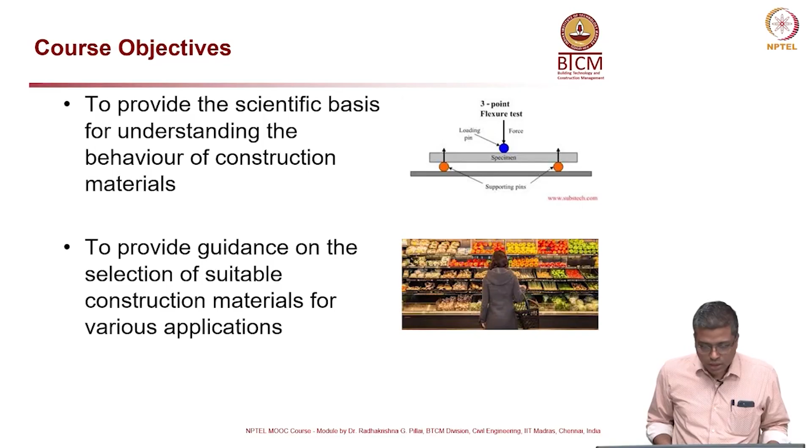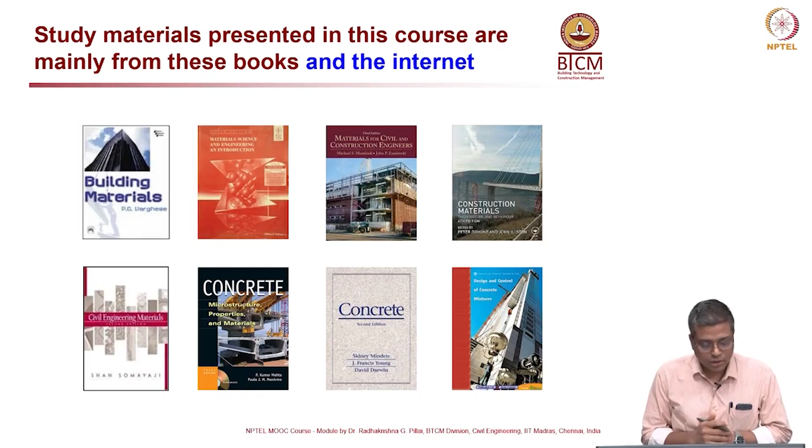Now, different study materials have been used for developing this course, including various books, and also a lot of information from various sources on the internet. So it is not just following one book; a lot of information has been put together for this course material.

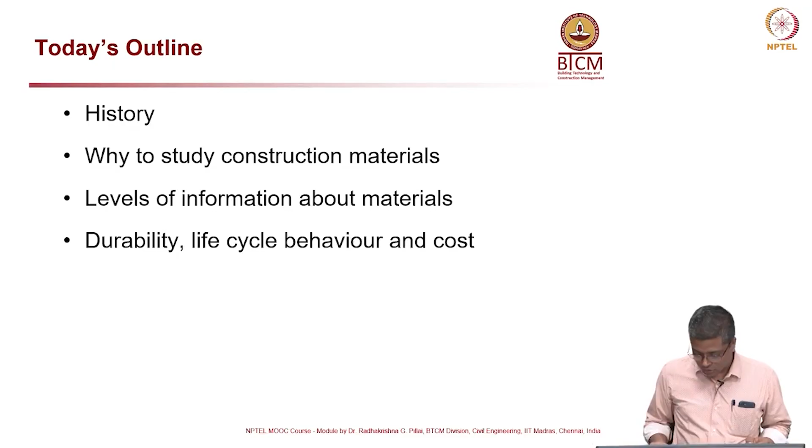For today's outline, we will first look at the history of construction materials and why we study construction materials and their behavior, and what are the 3 different levels of information about various materials. Then we will also talk about durability, life cycle behavior, and life cycle cost of construction materials.

Now, construction material science and engineering involves the use of basic science in understanding how a material will behave. That means we will even go into the chemical bond, molecular structure, microstructure, etc. of the material, and also how a material behaves in terms of its stress and strain behavior. That is also very important to understand.

Once we know the stress-strain behavior, or thermal expansion, or thermal conductivity, we understand how the material behaves when it is applied either a mechanical load or an environmental load. This is very important, and a material's behavior could be very different depending on the type of application or the place where it is used. Now, how do we engineer a material so that it is able to withstand both the mechanical and environmental loading coming onto it?

How can we control its properties so that the material is able to withstand such loads while in service? We should also think about the cradle to the grave concept: when a material is unearthed, manufactured, or processed from the soil or ground through various manufacturing procedures, and we put that into the structure, until that structure degrades or its life is over, and we eventually dispose of the materials back into the earth. All of this has to be considered while we choose a construction material.

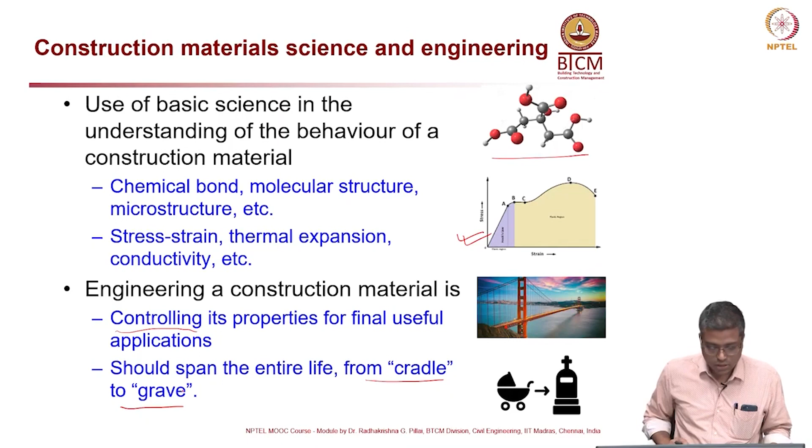Now let us go into the history of construction materials. First, we used to make houses or buildings using timber. Even today, in some places of the world, that is being practiced, depending on the climatic conditions and availability of timber.

We also used a lot of stone, and used to do that even today. Now, from the 20th century onwards, we've started using cement concrete, asphalt concrete, steel, polymers, composites, glass, and various other types of materials in today's construction.

Now, one question that comes up is whether all these materials are better than the ones in the past. Maybe not always. Some properties might be enhanced, but other properties might not be, or might even be less. So we have to really see what property we want from a particular material system, and whether the material in use is actually able to provide that or not. For example, in some cases strength may be very important.

In other cases, maybe some other property like thermal conductivity may be more important. So you have to see, but without compromising the strength. When you talk about material selection, all the properties have to be considered before we choose. Now, material research can solve some of these problems, or if you have an issue, it can

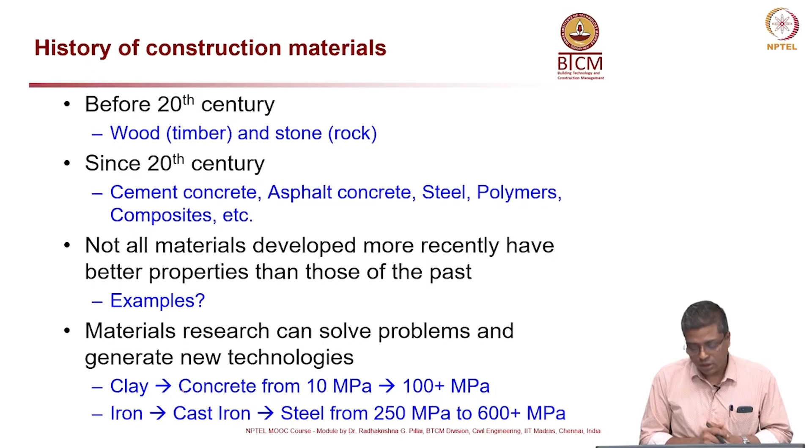Now, why do we need to know about the science and technology of materials? Because the behavior of material systems depends on properties at both the macro and micro level. So microstructure is very important, and also the macro behavior, how the material systems are put together, that is also very important when we talk about the behavior of a building or a bridge, for example.

Now, various information at different levels have to be brought together to give the foundation for materials technology which is needed for practice. Practice, when I say a material which is used, let's say a bridge, you use steel and concrete to make the bridge.

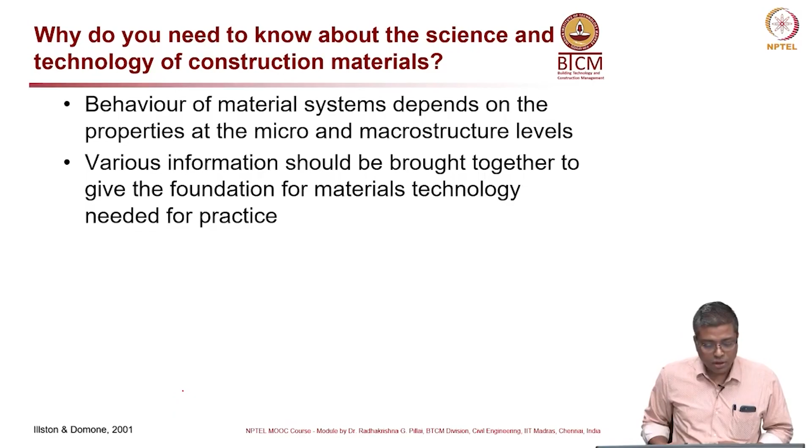If the bridge has to perform well for a long period of time, the properties of the steel have to be good, the properties of the concrete have to be good, and also when you put together steel and concrete as a composite system, that system also has to perform very well and meet all the requirements. Now, to achieve this, the material testing, how the material is processed, how it is handled and placed in the structure, and also the basic science behind all this have to be very thoroughly understood.

Hence, because of all this, training in the science and fundamentals must precede the development of new and better materials. You cannot really make a new material without really understanding the science and fundamentals behind it. So science is very important for application, which is essentially engineering.

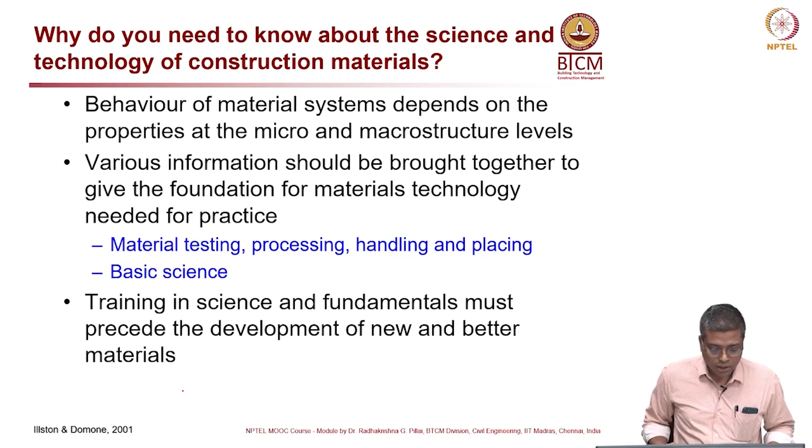Now, what are the three levels of information we talk about when discussing materials, especially in construction? I'll talk about three levels. One is the information available at the molecular level, which we can call the nano or micro level information. The next is materials structure level information, not the engineering structure but the material structure level information, which we can call mesoscale, and then engineering level information, which is slightly larger, which we call macro scale.

So you can see the pictures on the right side, the molecular level, and then when you talk about stress-strain behavior of a particular material, that is the material structure level information, an example.

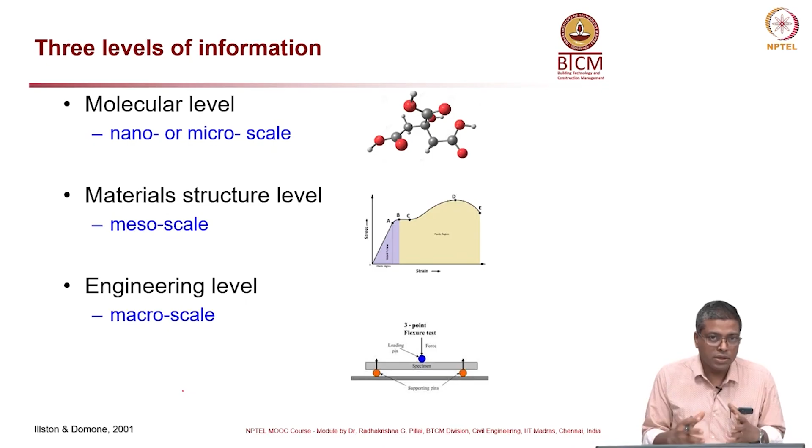And if you are talking about a beam, or how a beam will be made out of steel concrete system, how it is behaving, that is all about engineering level. Now, I will talk one slide each on these three levels of information.

In molecular level, you can see the sketches and images over there. We are talking about atomic bonds, lattice structure, crystal structure of metals. On the right side is an example for clay, where you can see different layers. Clay materials are typically layer type materials, and you can see how it looks through a microscope on the bottom right.

Other examples of this atomic or molecular level information are the type of chemical complexes present. For example, in concrete you have calcium silicate hydrate, which is the binding agent in the cement concrete system. And when you talk about wood, you have cellulose molecules, which are a key player influencing the properties of wood, and polymers, composites, etc.

The physical structure and chemical composition can explain material properties and the evolution of materials over time. For example, when concrete becomes hardened it continues to react, and after some days it will evolve: the strength will increase, the pore structure will get more refined. A lot of chemical reactions happen when we mix cement and water together.

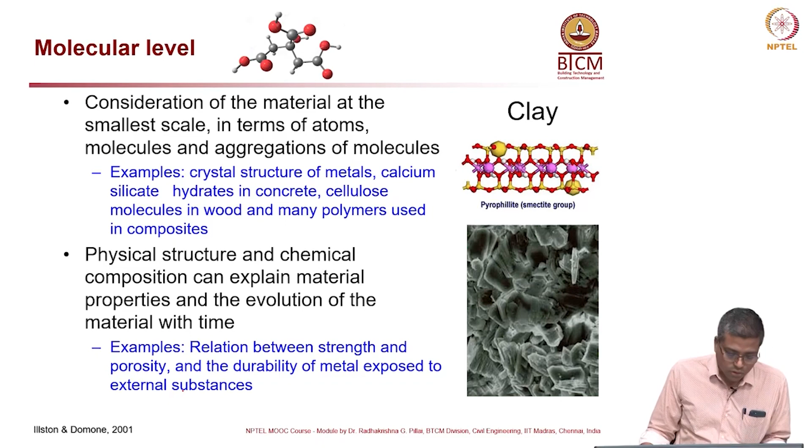Now, how the strength, pore structure, etc. is changing over a period of time can be very good information to determine whether that particular concrete can be used for a particular application or not. Especially if you want a structure that will last 100 years, we need to know the quality of the material at microstructure level, and based on that we can say whether that structure will last 100 years or not. So a lot of science goes behind this.

Now, when we talk about material structure level, that is the second level of information I mentioned, and it can be considered as a composite of different phases which interact to give the total behavior. The picture on the right shows a clay brick.

So how the clay materials are when they burn the clay, like you heat it up, there are a lot of chemical reactions which happen. And the final product, the hardened brick, you can look at its microstructure, how the different sand particles or clay particles interact and bind together.

Of course, clay made in one place may not be the same as in another place, or if you don't heat it properly, you will not get the properties you are desiring. So there are a lot of chemical reactions involved in the making of clay, and if we know the type of clay materials used and the type of processing like the heating treatment, etc.

At each location, the entire clay brick, how they experience and how the reaction between various phases or material elements within the clay system occurs, how they react, how well they are bonded together — all that can tell us the strength of the clay brick, and how it will behave, whether brittle or with a certain strength, etc.

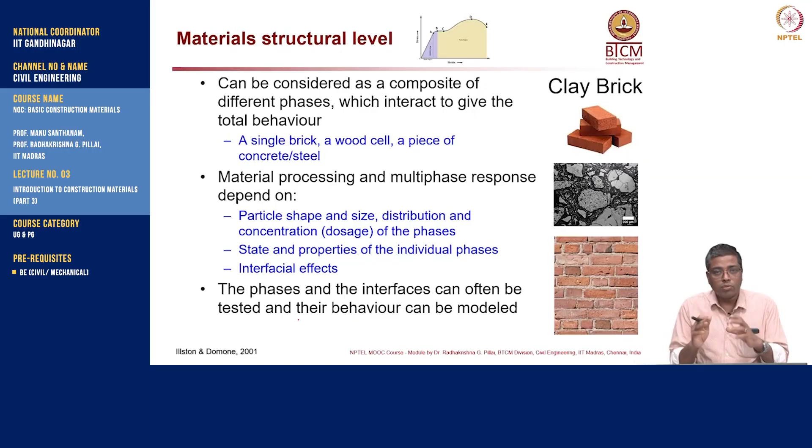The third picture, at the bottom right corner, shows the interface. When you talk about a clay brick wall, you also have to worry about how the mortar between each brick is bonding or binding the clay bricks together as a single wall unit. So all these interfaces, how the properties at the interfaces are, is also very important, in addition to the interface between the various particles within the clay.

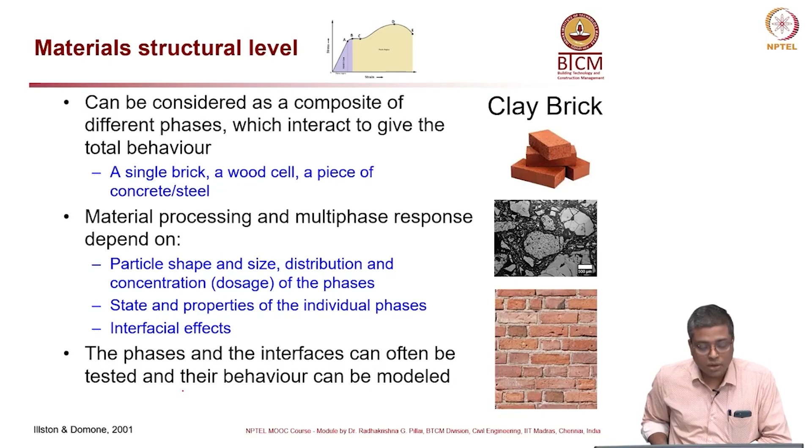The phases and interfaces can often be tested, and then the behavior can also be modeled. Now, the third level we talk about is called the engineering level. I am also taking an example of bricks here, since that is what we have been discussing, and you are probably more familiar with that at this stage.

Now, consider the total material normally taken to be homogeneous and continuous, and then the size of the representative unit. When you talk about engineering level, you need to understand what is the size of a representative unit.

Here the representative unit is not just one brick piece, but a small area of a brick wall, where the brick which is used and the mortar which is used all play a role in the behavior of that panel, shown in the top right image. This image shows that it is not just one brick which is being tested. They make a panel of brick and apply some load on it, to see how that brick wall element or representative unit of a brick wall is going to behave.

Once you understand the properties from this representative unit, you can even model it, as you see in the bottom right image, where testing was done on the structure itself, to see how the structure as a whole will behave. All this can be done, and this is what we mean by engineering level, and such information is very useful in designing structures for various applications.

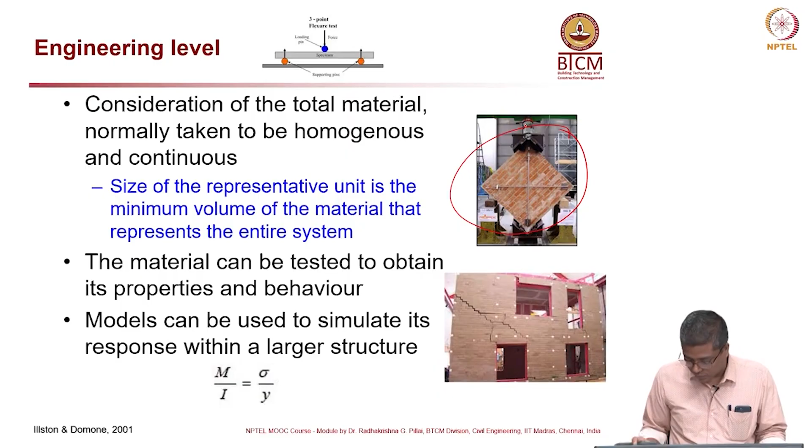Now let us talk about what you have to consider while selecting a construction material. One thing is cost effectiveness, then the desired performance for the entire life of the structure, then the essential criteria that the material must satisfy from the beginning till the end of the life of the structure, and then other application-specific criteria also we have to look at.

Cost effectiveness is for the purpose for which the structure is designed. For example, you can design a bridge considering different material options. The cost will depend on what type of material you are using. If it is a wooden bridge, it might be a different cost, if it is a concrete bridge or a steel bridge, the cost will change significantly. So we have to think about the cost of the structure while designing the material system itself; cost has to be kept in mind.

Then the desired performance. When we talk about desired performance, that means the material should perform adequately during construction, in the service period, and also during the failure and demolition phase - that is, from cradle to grave. So the material system should perform in a desired fashion for this entire life of the structure.

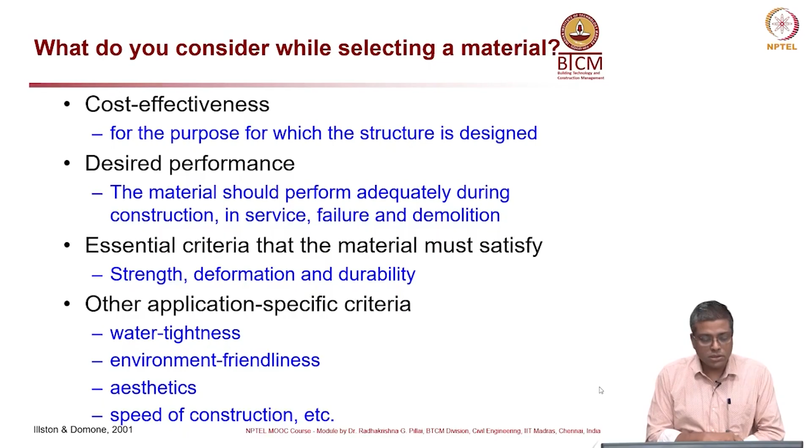Now, when you talk about money, economic factors, what are the factors which affect the cost of construction? Definitely availability of raw materials is very important. In civil engineering construction, whatever material we use, we consume in very large quantity. So you have to think about the unit cost of the material, where you can get it from, the type of material, its availability, and the transportation cost, all of this has to be thought about so that you can find the least expensive or optimal option, again without compromising the quality of construction.

Now, how can we reduce manufacturing costs? If we can design systems with repetitive or similar type of elements, more in number. For example, brick: if I make every brick at site, it is going to be very costly. But if the brick is already a manufactured product, you can order it in large numbers, and the cost of an individual brick comes down significantly.

Another example is precast elements. For concrete structures, nowadays there is a lot of trend towards adoption of precast technology, where elements are made in a factory environment with well-controlled quality, then brought to the construction site and assembled there. This technology is picking up fast nowadays and is a need of the hour, because there is a huge requirement for significant construction in our country. So precast construction technology is very much essential, I would say.

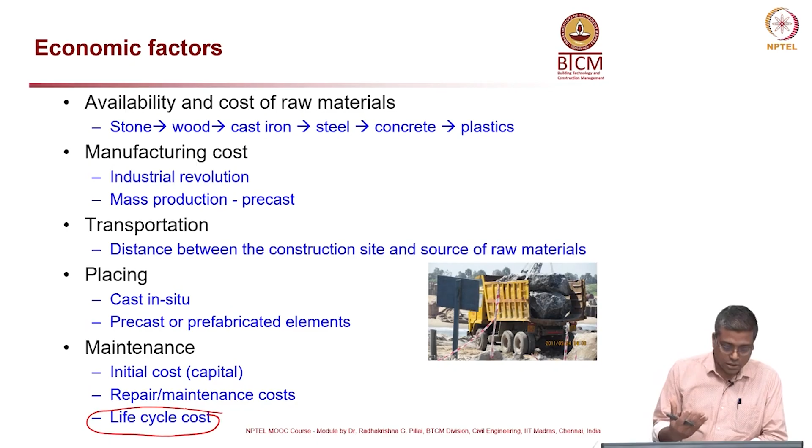Life cycle cost is something very important to think about. This has to be brought into many construction projects. So how does the choice of materials affect the life cycle cost of the structure, rather than only looking at the construction cost? Now, when you talk about life cycle cost, I am going to show you an example which will help you understand what I am talking about.

Now here you have two options: one is a conventional material alternative and a durable material alternative. Think about an example of a pair of shoes. In the first one, this person has to repair the shoe very often. In the second option, this shoe is a very good quality shoe and you do not have to repair it very often.

Now look at the top half of the graph where you have CC, construction cost, with respect to a conventional material. The subscript C is for conventional material, and the bottom one is for durable material. The subscript D is for durable.

Now in case of conventional material, there are 1, 2, 3, 4, 5, 6 times repair has to be done. For example, in case of a shoe, if the shoe is not of good quality and you are roughly handling the shoes - even the same thing happens in structures also - there could be cases where the structures experience severe exposure conditions, etc.

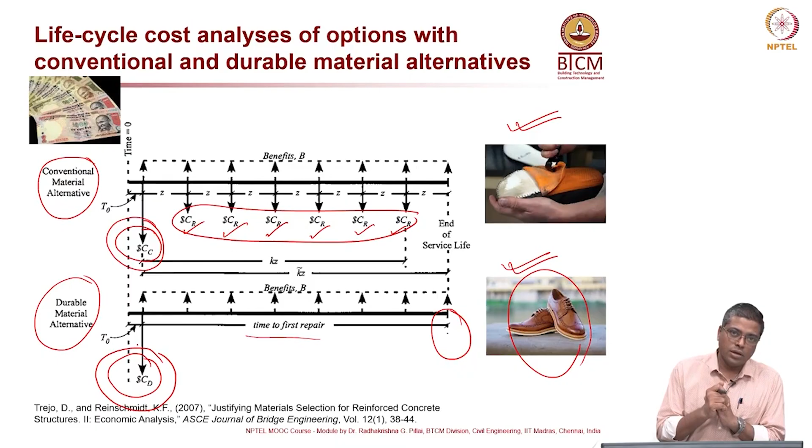So when you look at these two options, you might find that going for a durable option, maybe it is a little more expensive in the beginning, but your life cycle cost is going to be significantly less as compared to a poor quality material in use.

Now again, some more things to consider while we select. I already discussed this, but I will show this with a schematic, so it is easy to understand. When we talk about any material, we first take it from the earth. Let us say aggregate or cement, anything which we talk about in construction, it is all coming from the earth.

So there will be a mine, you take the material, and then you manufacture the particular product. In case of concrete, you may have to make cement using limestone, clay, etc. You make cement, and then using aggregate, cement, etc. you make concrete, and after that you use that material at the site. During the occupancy of the material, it is exposed to the external environment and also the structural loading. So both mechanical and environmental loading are important during the occupancy.

Because of mechanical loading, the structure might start cracking, and during environmental loading, it might have some chemical actions on the structure, which might lead to some deterioration, which might eventually weaken the material, causing cracking or deterioration. So during the occupancy, you have to maintain the structure very well. If you do not maintain, it is not going to have long life. So maintenance is also very important, but during that time the material can degrade during service.

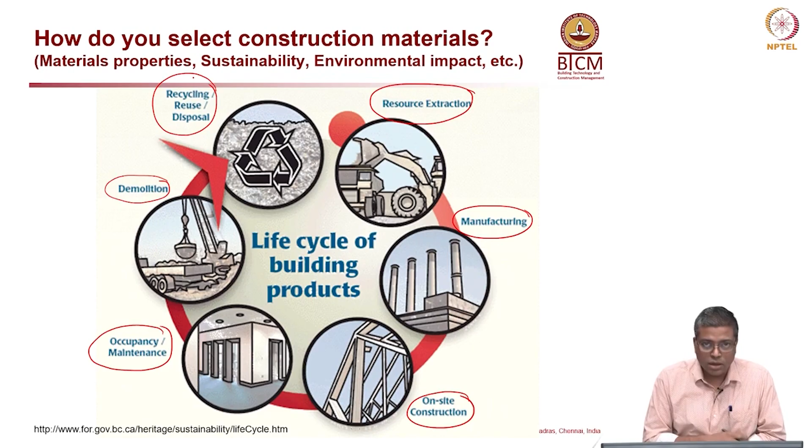So this is the life cycle of building products or building materials. Various materials which we use, we end up either recycling, reusing, or we have to dispose the material. So choice of materials and how you demolish, all that should be thought through, so that we can maximize the reuse and recycling of material. That is today's requirement.

So to summarize, we looked at the history of construction materials, why to study construction materials, and we also looked at different levels of information about material, that is from the microscopic level, and then we looked at the materials science level, structure level, and then the third one was on the engineering structure level. Then we also talked about life cycle behavior, cost, durability, the whole life cycle, and what are the various things to be considered while selecting a material.

It is not only to select a material based on only the initial performance, but we have to think about the life cycle performance. So if you are designing a structure for 100 years, you should choose a material which will actually last for 100 years without much maintenance, or minimal maintenance cost. That way we can reduce the life cycle cost of the structure.

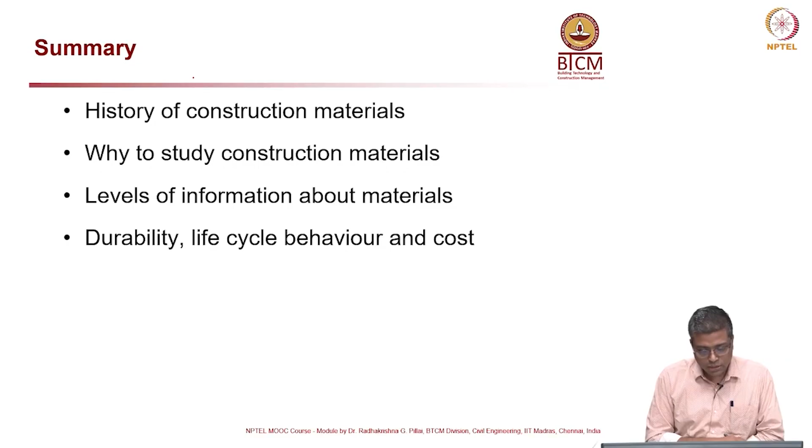So this is something very important, and I thought I will put this in on the first day itself, which is on the importance of learning how to write technical reports, or the ability for technical communication, and also how to make good drawings, engineering drawings.